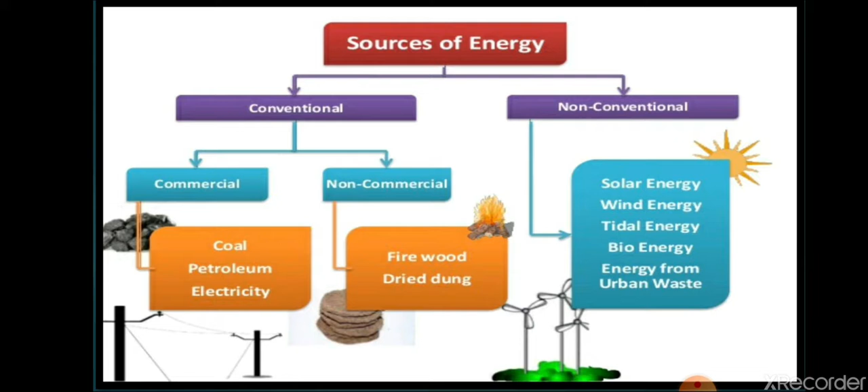Let's start with the advantages of non-conventional sources of energy. First of all, these sources of energy are renewable, meaning they can be renewed again and again. We get these types of energy resources from long-lasting resources like sun, wind, and water. All these provide us non-conventional sources of energy.

They are cheaper also. Once the plant is implemented, it runs for long. Now, scarcity of fossil fuels - as conventional sources of energy are depleting, we are moving towards non-conventional sources of energy. This can also fulfill the need of rural areas as well as large industries or populated areas. They are inexhaustible and environment friendly.

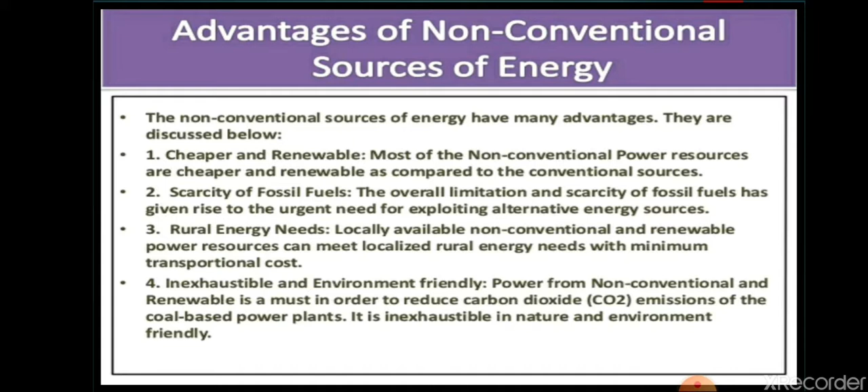One most important benefit of these resources is that they are eco-friendly, meaning they do not cause so much pollution in the environment. So all these are replacements of conventional sources of energy. I hope it is clear to you - the advantages of non-conventional energy are that it is cheaper, inexhaustible, and renewable.

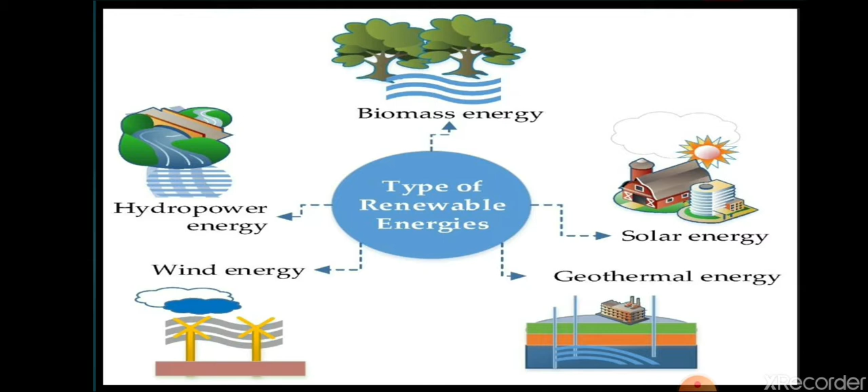Now let's see the major examples of renewable energies. Solar energy, geothermal energy, wind energy, hydropower energy, biomass energy, and tidal energy. So let's start with the first one, hydel power.

So whenever we talk about hydel power, what do you understand? Hydel power refers to energy, it is mostly electric. Hydel power means the power generated by water, the power produced from water - that is only known as hydel power. Hydel power is energy that comes from the force of moving water. The main advantage of this form of energy is that it is clean and renewable.

As we know, water is available, it follows the water cycle, so it is always available for us. With the high speed movement of water, we prepare power. Hydropower plants are based on a simple concept of water flowing through a dam. Have you seen a dam? As you can see in the picture also. This hydropower plant works on this concept - water flows through a dam, that water turns a turbine, and that turbine in turn turns the shaft of the generator.

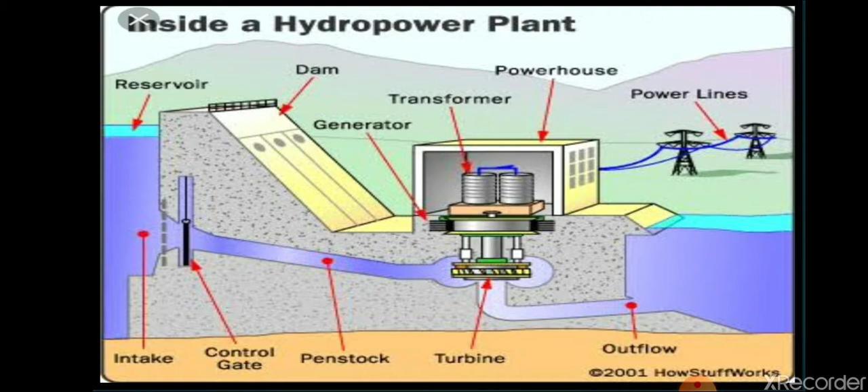As you can see in the picture, I'll explain you. Firstly, they make a reservoir to create potential energy. After that, they open the intake, and from there they take the flow of the water. The speed of the water is very high, which helps in moving the turbine.

This turbine will move and it will help in the movement of the shaft of the generator. Due to that, this generator will also move. Now here a transformer is kept, which will change the electricity or manage the voltage, and after that it is supplied through power lines to various areas. So like this, electricity is produced with the help of water.

As we know, water is the most important source of energy used to generate electric power. So basically this is the most important conventional source of energy, that is hydropower. We can also say hydropower is nowadays slowly becoming older in usage, so we can consider it a conventional source of energy, but in your book it is given as a renewable resource. It is a renewable resource only, but now it is becoming a conventional source of energy because we have been using hydropower for a long time.

In some countries like Norway and the Democratic Republic of Congo, hydropower provides at least 99% of the country's electricity, meaning it is the major source of producing electricity in many countries. Canada is the world's largest producer of hydropower, after that the US. Russia is also there, Brazil, China, and Norway.

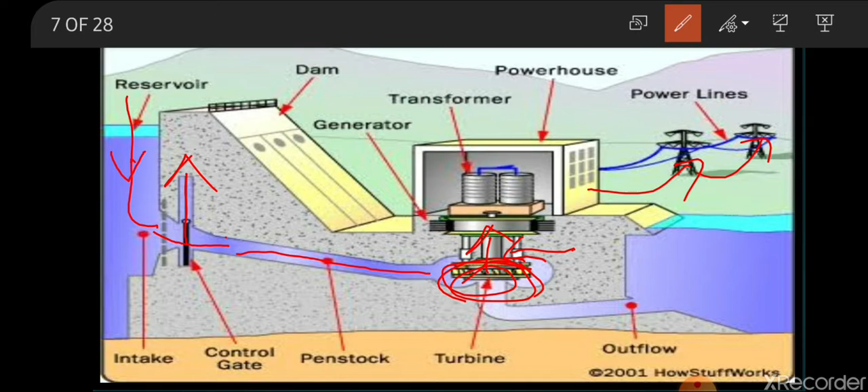And not only this much, our country India is also able to produce hydropower now. I hope hydropower is clear to you. The energy that is produced by water, or by moving water, is only known as hydropower. Now let's see the next one, that is solar energy.

All of you know that sunlight is the largest source of non-polluting renewable energy received on earth. Sunlight is something that is not going to end, and it has been supplying energy from a long time, and continuously solar power is reaching to us. So it is non-polluting also.

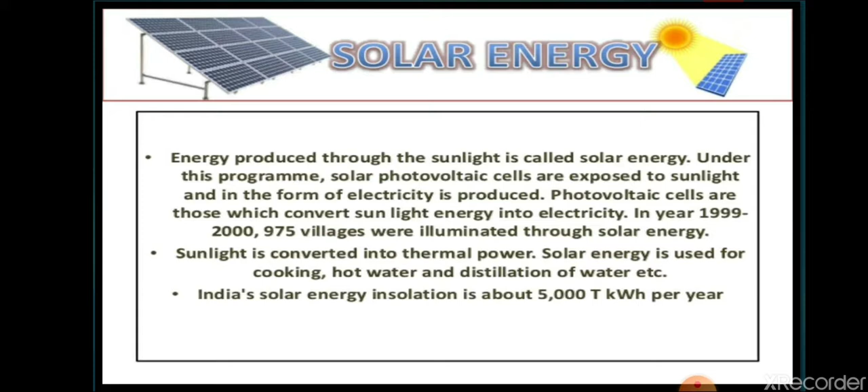If we utilize this power into energy, if we start using it, all of you are familiar with solar power. We have seen solar cookers, solar calculators, watches, water pumps. Nowadays a whole solar panel is used for producing electricity or producing energy from solar power. Basically, solar energy can be directly converted into electricity by solar cells, that is photovoltaic cells.

As you can see in the picture, these are the photovoltaic cells. What is the work of these photovoltaic cells? They used to change solar energy into electrical energy. So which cell is used to change solar energy into electrical energy? That is the photovoltaic cell. A single cell can produce only 2 watts, so that is why a long chain is used. Basically many cells are connected to produce thousands of kilowatts of electric power.

We have seen in our villages also, solar power street lights are there, the street lights that work on the basis of solar power. One solar panel is attached to the pole, and from that only the street light used to glow. So this is only known as solar energy. Since sunlight is a continuous source of energy, and it is renewable also, and it does not cause any pollution, that is why it is a non-conventional source of energy.

Presently, solar power is replacing 5 million diesel pumps in India also. Now it is taking the place of conventional sources of energy. So in India, basically the Thar Desert is very famous for the production of solar power.

Now you can see here how solar panels are attached to the roofs. We can use solar energy or solar panels at our home also. These are the solar panels from which photovoltaic cells convert solar energy into electrical energy. And as you can see, it is attached to generators or transformers that convert that solar energy into electrical energy, and from here only it is transferred to various electrical equipment for running various electrical equipment in the house. So I hope it is clear to you how solar energy is used as a conventional source of energy nowadays.

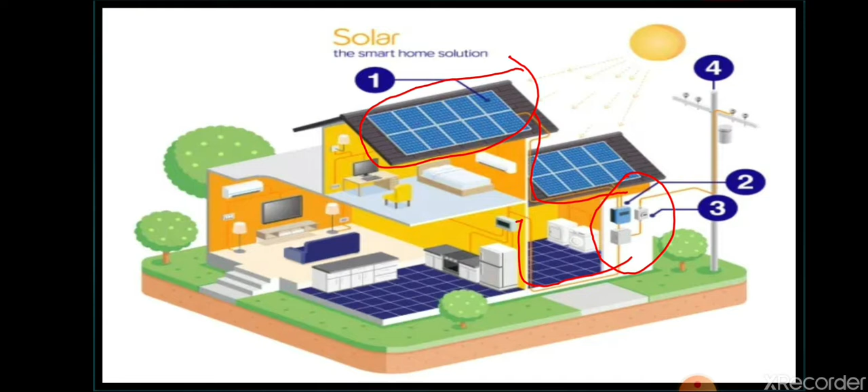Now let's see wind power. As we know, moving air is called wind. Moving air means that air has speed. So wind energy or power is the use of wind to generate electricity. We use this wind, the speed of air, to produce electricity. Basically, wind power has been used to grind grains and pump water. Earlier, wind power was used to grind grains.

We have seen that with the help of wind, people used to grind grains in the past, and this has become important now due to the shortage of fossil fuels.

Since conventional sources of energy are exhausting, we know that wind is a renewable energy, and it is also free. It is cost free. We do not have to pay anything for getting the wind.

The use of wind for electricity generation has been increasing rapidly, and it is estimated that wind power would eventually replace all fossil and nuclear fuels.

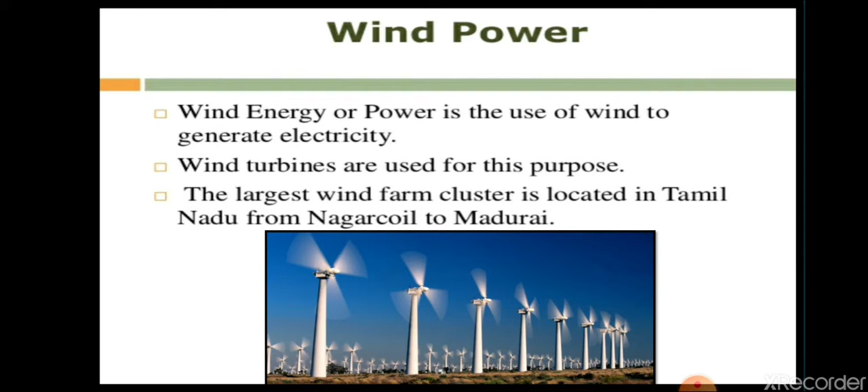As you can see in the pictures, various wind turbines are used. You can see how the wind turbines move, which helps move the generator to create electricity. That is connected to a transformer that is used to increase or change the voltage, and from there the electricity is sent to various distribution lines or areas. So with the help of wind power, electricity is produced.

In India, Tamil Nadu has the largest number of windmills, followed by Gujarat. So in India, the state having the largest number of windmills means there are so many wind vanes used there, as you can see in these pictures. Tamil Nadu is the largest producer of windmills, followed by Gujarat.

If we talk about the world, there is Denmark, Germany, Spain, US, India, Italy and Netherlands. These are some of the countries that are installing wind power for generating electricity.

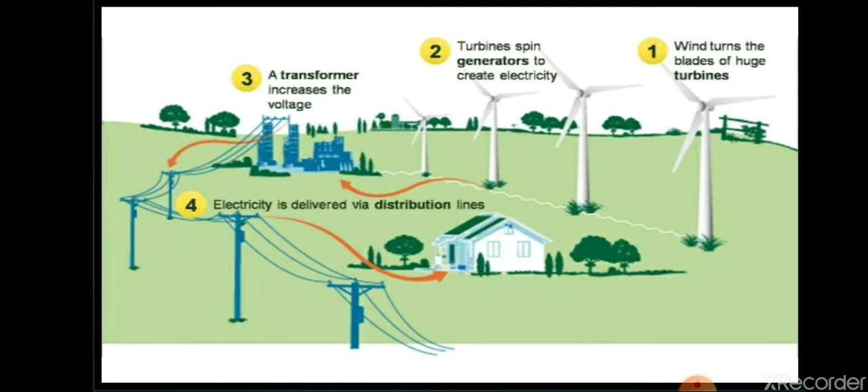Now we are moving towards nuclear power or nuclear energy. I hope it is clear to you; nuclear energy is a little bit new for you.

Students, there are various elements scientists have found out. Those elements are radioactive, that means they react with each other. We can take the example of uranium, thorium, plutonium. These are radioactive minerals, and nuclear technology uses a fuel called these radioactive minerals like uranium, thorium or plutonium, and there are many more radioactive minerals.

So what is nuclear energy? Nuclear energy is generated by splitting the nuclei of heavy atoms such as uranium. When these atoms split into two, they create a large amount of energy, and that energy is used for producing electricity or for producing various works.

So basically the uranium atom is split into two. As this happens, energy is released in the form of radiation and heat. This process is known as the fission process.

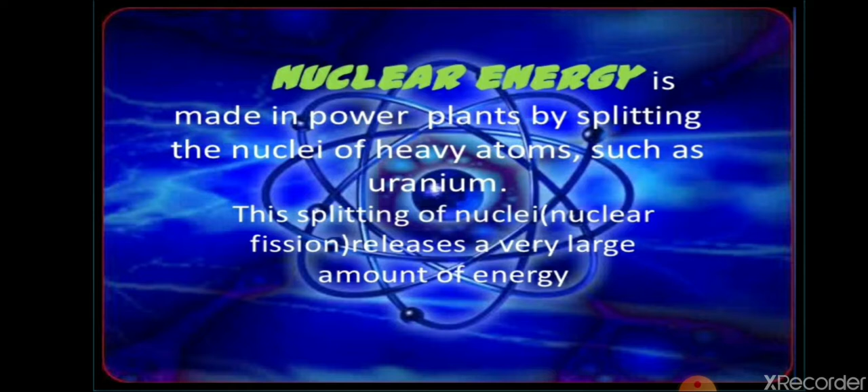There are two processes in nuclear energy: one is fusion and one is fission. Let's see what fusion and fission are.

As you can see in the first one, it is nuclear fission. In nuclear fission, one large atom is divided into two smaller atoms, releasing a large amount of energy. That energy is used for the purpose of generating power, for changing it into electrical energy and various forms of energy to run machinery. So basically, nuclear fission is when an atom breaks into two.

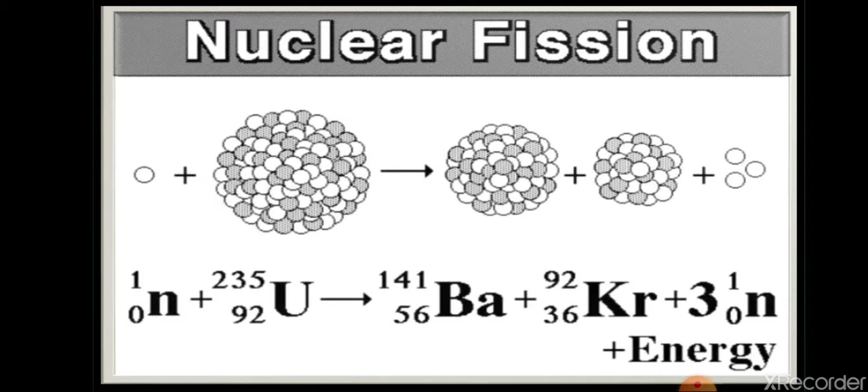Now nuclear fusion means when two smaller atoms combine with each other. That also creates a large amount of energy, when two light nuclei fuse together to form a heavy nucleus. So both these reactions emit a large amount of energy that is used for generating electricity.

Nuclear energy is created through a mechanism called a reactor, as we have seen in nuclear power plants. The power source is the heat produced by a controlled nuclear fission chain reaction of uranium and other radioactive elements. So a chain reaction occurs; not only one uranium element but many uranium elements are splitting into various elements, and that creates an enormous amount of energy used for various works.

But there are some pros and cons of nuclear energy. The advantage is that the amount of electricity produced in a nuclear power station is equal to that produced by fossil fuels, meaning nuclear power plants give a good amount of energy to us.

In this there is no burning of fossil fuels, and they do not produce any damaging or polluting gases. That means they are eco-friendly also.

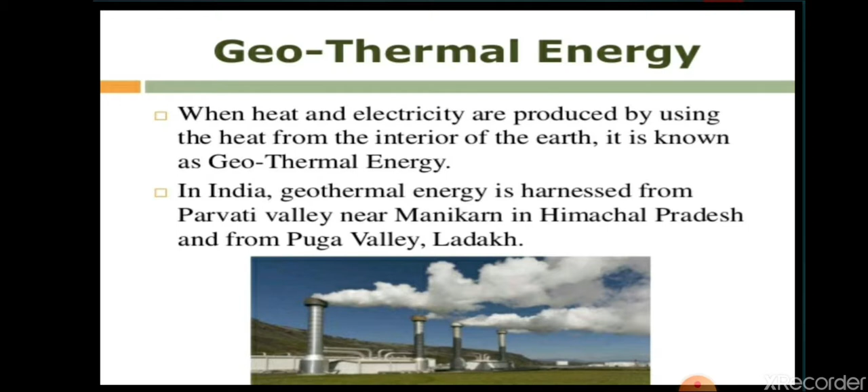Let me give you an example. This place is Manikarn, in Himachal Pradesh. As you can see, it is a hot spring. A hot spring is a spring of water that generates by itself as underground water. The temperature of this place is approximately 96 degrees Celsius.

As you can see, steam is coming out from the water body. This heat is only used for generating power. People there used to cook their food also on this hot spring water. This is a very famous geothermal power station in India, in Manikarn, Himachal Pradesh. It is a famous tourist spot also.

Geothermal reservoirs are pools of water beneath the earth's surface. That pool of water is heated by magma deep below the surface. That water or steam can escape from cracks in the earth in form of geysers that come to the surface through aquifers, and that only forms the hot springs outside. So that is the ability to harness the steam. People used to utilize that steam for generating power coming from the surface of the earth. This is the work of the geothermal power plant.

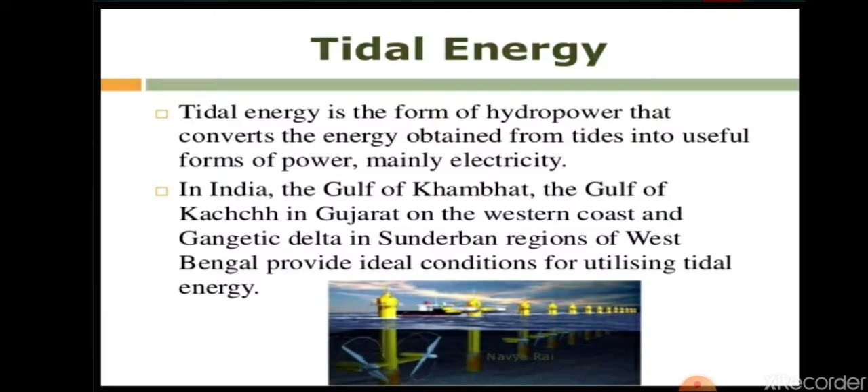This works just like hydel power. The waves and tides are there, and turbines are fixed there. As you can see in this picture, turbines are fixed in the ocean, and waves help in moving the turbines. The turbine moves with the help of the moving tides, and as the turbine moves, it is connected to a generator. The turbines help in the movement of the shaft of the generator, and as the generator moves, it produces electricity which is changed for usage and delivered to different places.

So it is also just like hydel power, but here we are using the tides for generating electricity. People use high and low tides by building a dam - they block the water and then release it. That means the speed of water is used for moving the turbine that generates electricity during high tides.

Ocean currents are also used to drive underwater turbines to generate electricity along coasts and islands. Ocean currents are the movement of water in the ocean. So tides and ocean currents are used for generating electricity, which is known as tidal power. There are very few places that generate sustainable power this way, because tidal power can only be produced where there are oceans or tides.

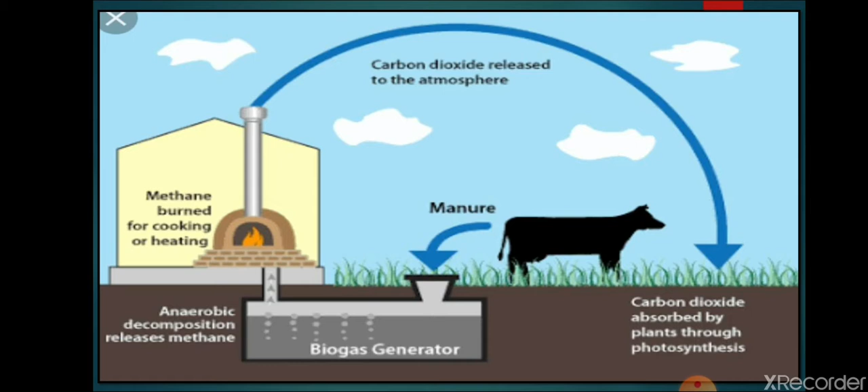But this source of energy also releases a large amount of carbon dioxide, and that carbon dioxide is used by plants in the process of photosynthesis. So I hope it is clear to you what is biogas.

Biogas is a clean and efficient fuel. It is a mixture of many gases - methane, carbon dioxide, hydrogen, and hydrogen sulfide are there. So if someone asks you what is the chief constituent of biogas, your answer will be methane, since methane is available in large amount in biogas.

Biogas is produced by the breakdown of organic matter in the absence of oxygen. What are the raw materials required? Animal dung, poultry waste, plant waste, human excreta, industrial waste, or domestic waste like vegetable peels or waste food materials. All these are used and changed into usable forms for converting into bioenergy.

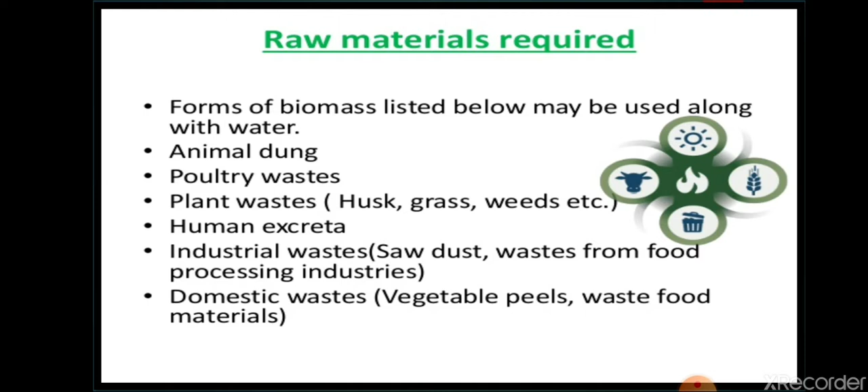So this gas is very useful as a fuel substitute for firewood. In place of firewood or dung, we can use it. Agricultural residues, petrol, diesel, electricity - we can use biogas in place of these.

Now if we will talk about biofuels, that means the fuel that can be generated by organic waste - that is biofuel. But there are various types of biofuels. If we talk about the oldest one, that is wood. Wood is also a biofuel.

They also use sugarcane for producing biofuel. When it is blended with petrol, the ethanol content is about 85%. They use various products together - they use the cornstarch, they ferment the sugarcane juice for producing energy. That is how they produce ethanol, which is a famous biofuel.

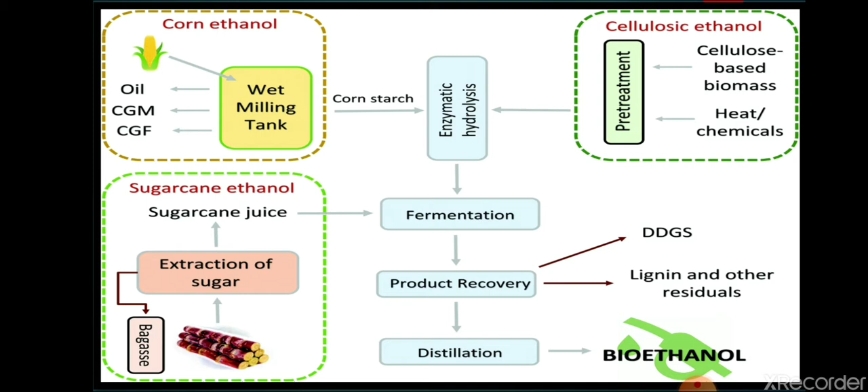Now if we talk about other biofuels, biodiesel is there. Biodiesel is produced from vegetable oil. Basically, seeds and vegetable foods are treated repeatedly, fermented, and converted into biodiesel. Biodiesel is generally made from soybean, palm oil, sunflower, canola, groundnut, rapeseed, and sometimes from recycled cooking oil - the waste oil from restaurants is also used for making biofuels.

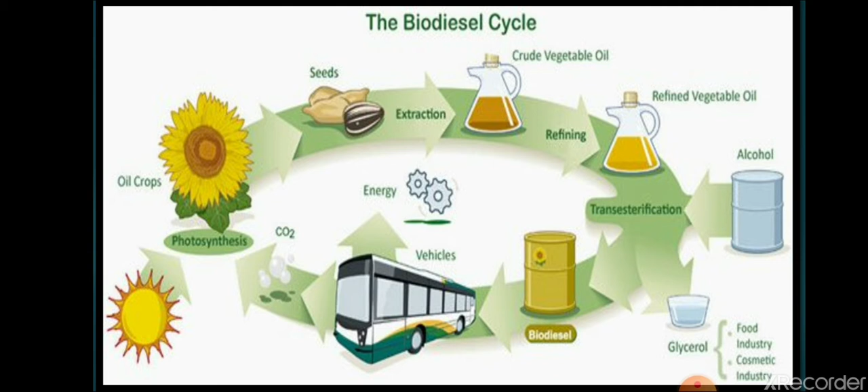Other than all these, there is methanol as well. This is a biodiesel cycle - oil crops are synthesized with solar energy, and from there it is changed in biorefineries into biofuels, and from that we get biofuels.

So I hope, if someone asks you to give examples of biofuel, you will mention ethanol. In biodiesel, if we talk about it, there is biodiesel, methane, methanol, butanol - all these are the biofuels being used by us nowadays. So students, all the topics I have covered till now, and I hope this chapter is very clear to you.

The last topic is about mineral conservation. Conservation means we have to protect the minerals, restrict their use, and use them in the field of sustainable development, so that minerals can be left over for future generations also. So we have to conserve our mineral resources, so that they will be long lasting.